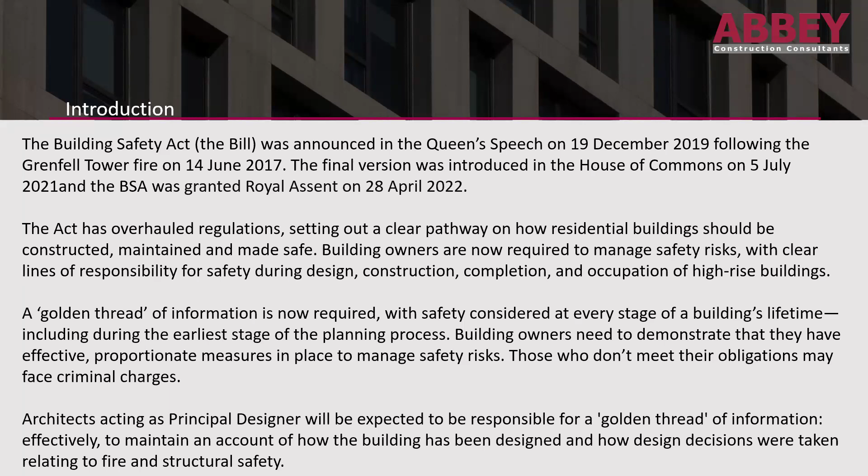These duty holders are those who procure, plan, manage or undertake building work, and they are named as the client, the designer, principal designer, contractor and principal contractor, as is the same with CDM 2015 regulations. Duty holders are required to actively consider and manage building safety risks throughout the commissioning, design and construction process, and ensure that designs, if built, as well as the building work, comply with the requirements of the building regulations.

Of course, the regulations set out that duty holders in the design and build and refurbishment of buildings will be those, or organisations, who commission the building work, i.e. the client, and those who undertake the design work, the designers, and those who construct the building, whether it's a new build or refurbishment, contractors. The regulations apply to all work to which the Building Regulations 2010 apply. So if the building regulations apply, then the Building Safety Act and secondary legislation will apply.

The duties of cooperation, coordination, communication and competence are applied to all the duty holders for building work associated with high-risk buildings. The Building Safety Regulator has a range of assessment and enforcement powers to ensure that those participating in the design, the build, the refurbishment of buildings will be held to account and to ensure compliance with the building regulations.

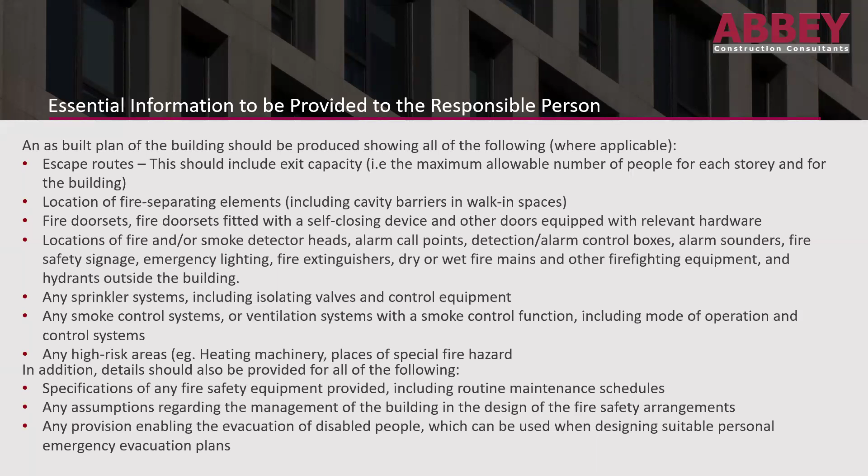Excuse me, I've got a bit of a cold and where I need to cough, I silence myself out.

So let's not forget about the Fire Safety Order, or the Regulatory Reform Fire Safety Order 2005, along with the Fire Safety Act 2021. So the Regulatory Reform Fire Safety Order was initially written with commercial industrial premises in mind, where premises is primarily a workplace. The Fire Safety Order would then apply to the whole building, and fire safety is linked with other aspects such as dangerous substances or dangerous processes.

The Fire Safety Act amends the Regulatory Reform Fire Safety Order with the intention of improving fire safety in multi-occupancy domestic buildings. Crucially, the external walls of a building and the fire doors to individual flats must now be assessed as part of the requirement for a risk assessment.

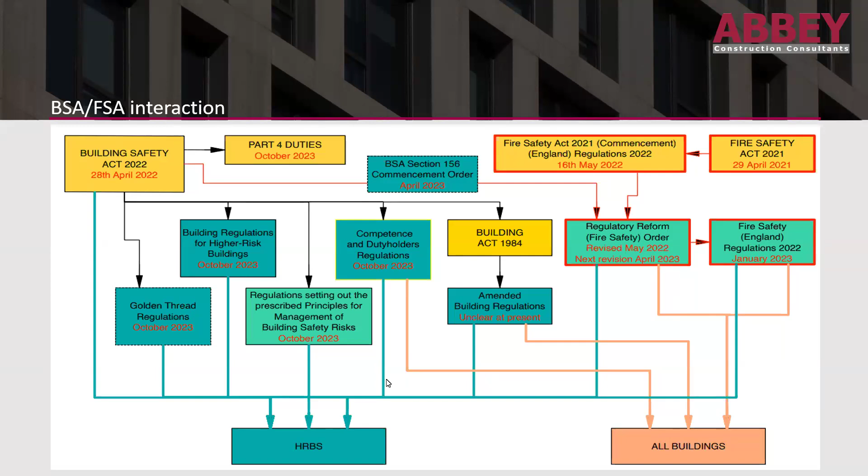And then we talk about fire safety documents. I was saying to Daniel as we started this presentation that there's so much information out there. It was knowing what is important to put in and what's not, because it's such a wide scope at the moment. So rather than go into detail in each one, such as tenants own fire risk assessments, tenants own maintenance records, testing of evac equipment, etc., I thought a flow chart would show that better than I could explain it.

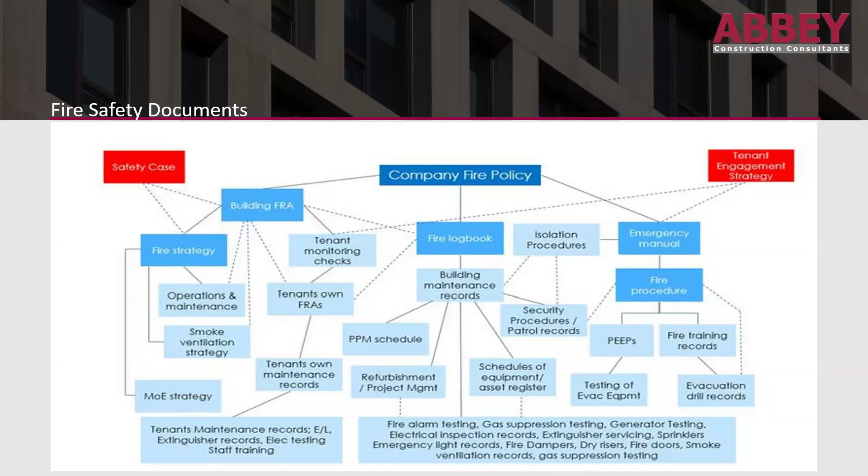So the Building Safety Act is made up of 6 parts, which is an introduction, its regulator and its functions, the Building Act 1984, the higher risk buildings, and other provisions about safety standards. And part 6 finishes it off with the general provisions around commencement, etc. I'm not going to read all these verbatim. I'll just give you an overview. So part 1 just explains the 6 parts that I've done.

Part 2 contains provisions about the safety regulator, what its functions are in relation to the buildings. Part 3 is where it amends the Building Act 84. And then amendments made by Part 3, Section 4, provide the regulator is the building control authority in relation to high-risk buildings in England. So any high-risk building in England, then the regulator would be the building control authority.

B, require the regulator for England and the Welsh ministers to establish and maintain registers of building control approvers and building inspectors. It's a little complicated reading that, but basically if it's a high-risk building, then the regulator is the building control authority. And to ensure where it doesn't fall into that category, they've now created a register of building control approvers and building inspectors, where they had a deadline to register their individual or their company through an assessment process to come onto that register.

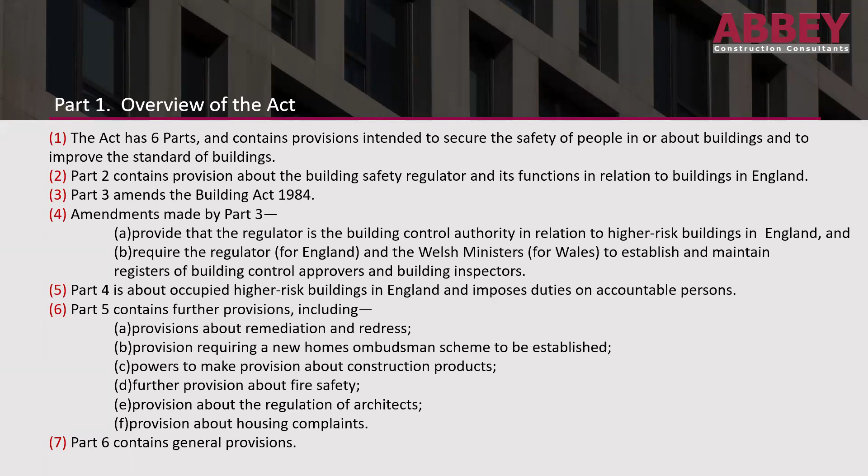So the regulator and its functions. The Building Safety Regulator, it talks about what this means. The Health and Safety Executive, although they're trying to come away from that. The schedule contains amendments to the provision of the Health and Safety at Work etc. Act 1974 that relate to the regulator.

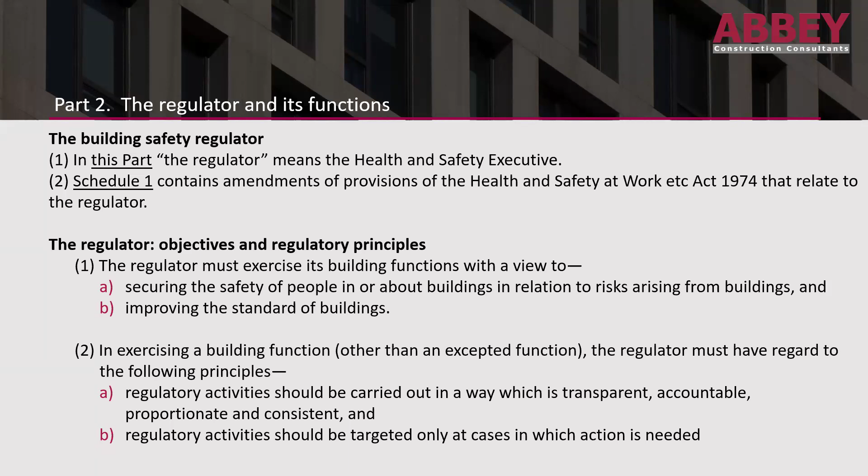But the regulator's objectives and regulatory principles are that the regulator must exercise its building functions with a view to securing the safety of people in or about buildings in relation to risks arising from buildings and improving the standard of buildings. 2, in exercising a building function, the regulator must have regard to the following principles. That's regulatory activities should be carried out in a way which is transparent, accountable, proportionate and consistent. And the regulatory activities should be targeted only at cases in which action is needed.

Part 3 of the Building Safety Act is construction, applies to new build or refurbishments, but mainly all new building work. Part 4 is in occupation, so in scope buildings, high-risk buildings, residential part of buildings. What is a high-risk building? There's a bit of a better picture later, but it's any structure which is 18 metres high or 7 stories and has 2 or more occupied units, of which 1 has to be occupied. A building safety risk is a risk to safety of people in or about a building arising from any of the following occurring as regards the building: the spread of fire, structural failure, or any other prescribed matter.

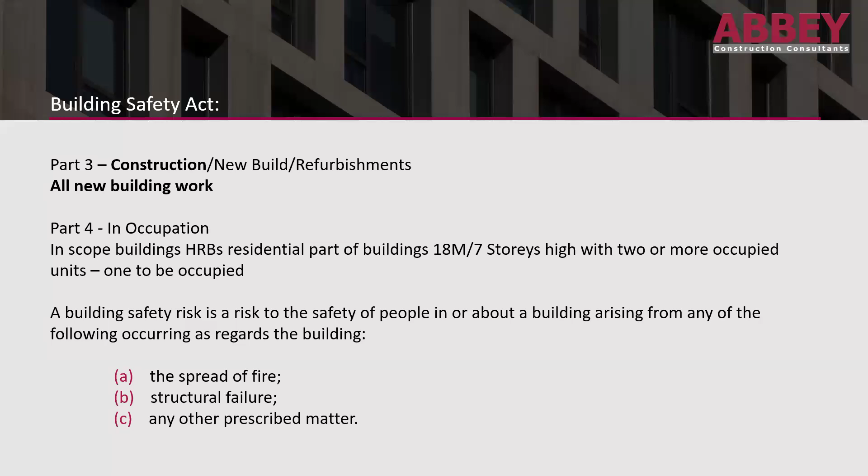The new regulatory regime regulates and holds to account those participating in the design and construction of new buildings and the refurbishment of existing buildings. The regulations apply to all building work and all persons participating in that work. The provisions also apply to those appointed under the Construction Design and Management Regulations.

When CDM applies to building work, those appointed under CDM 2015 will be deemed appointed under the building regulations, but only if they've got the necessary skills, knowledge, experience and behaviour. The provision will also ensure that when buildings are designed, constructed or refurbished, all duty holders, including existing duty holders identified in CDM 2015, will have formal responsibilities for compliance with building regulations.

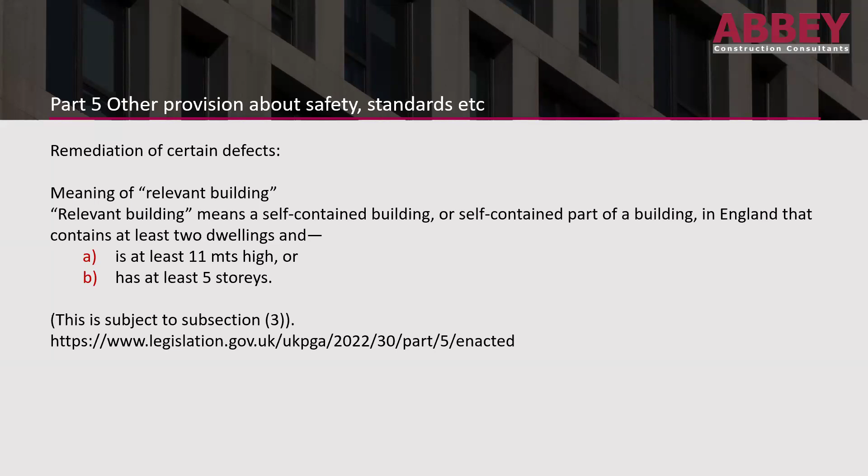So I'm jumping now on to the new Part 2A, which is the Building Regs Amendment England Regulations 2023, and it created a new Part 2A, Duty Holders and Competence, into the Building Regulations 2010. I've listed out the most important ones. So 11A: a client must make suitable arrangements for planning, managing and monitoring a project, including allocation of sufficient time and other resources, so as to ensure compliance with all relevant requirements. Arrangements as to information, i.e. higher risk building work.

Go on to 11B. Client must make suitable arrangements to ensure information is provided to the designers and contractors working on a project which includes any higher risk building work, to make them aware that the project includes higher risk building work and the nature of the higher risk building work. 11C: where the client is a domestic client, the duties in regulation 11A(1) to (3) and 11E(2) must be carried out by either the principal designer or the principal contractor.

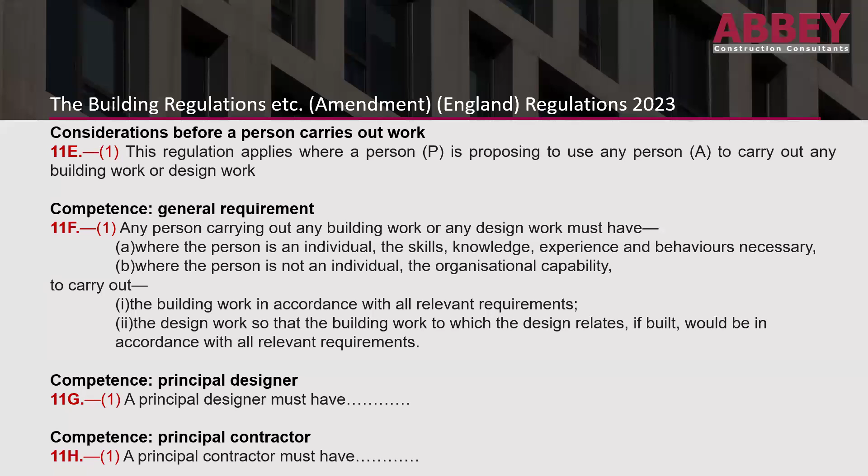What I'm seeing in industry is the PQQs are still getting sent out where they've not taken into account the BS or the PAS document competence requirements. I've also got a thing with PQQs where they'll ask if they've suffered any prosecutions in the past 5 years, but they tend not to ask if they've suffered a fee for intervention, which is, in my opinion, relevant. So there's a hint there for your PQQs.

And that moves us on to duty holders regulations, where we look at the accountable person and the principal accountable person. So an accountable person is an organisation or individual who owns or has a legal obligation to repair common parts of the building. Common parts are used by residents, for instance, the structure and exterior of the building, corridors, lobbies, staircases, etc. An accountable person can be a freeholder or estate owner, a landlord, a management company, resident management company, a right to manage company, commonhold association, etc.

A principal accountable person: each building must have one clearly identifiable accountable person who would be known as the PAP or the principal accountable person. The principal accountable person is usually an organisation like a commonhold association, local authority or social housing provider, and in some circumstances an individual can be the PAP. For example, the individual is the owner of the building or named on a leasehold as responsible for the maintenance of common parts.

The golden thread, which is set out as part of Regulation 11A. So the arrangements made by a client under Regulation 11A must be suitable arrangements to ensure compliance with the requirements, etc., of the building regulations. They must include, where the work is higher-risk building work or a stage of higher-risk building work, arrangements for an electronic facility to be created and maintained by the client, and procedures for persons involved with designing or carrying out work to have access to the facility for the purpose of maintaining the golden thread.

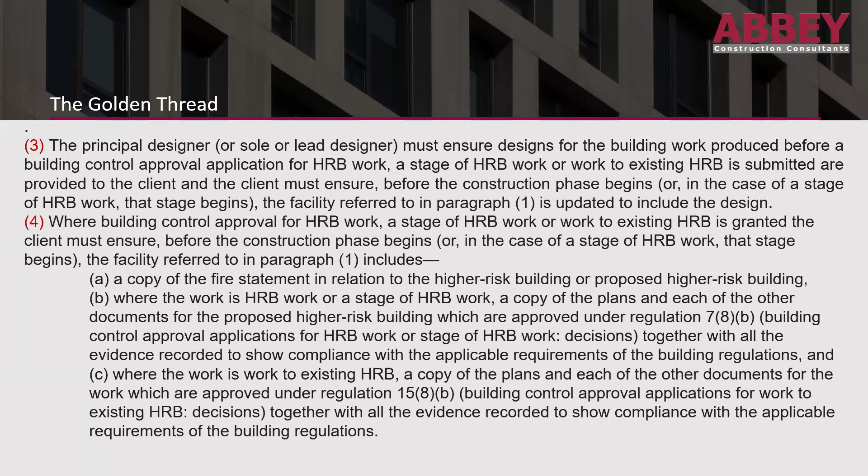Excuse me. So that moves us on to the safety case. Reasonable measures must be taken to manage the risk of spread of fire and structural failure to prevent their occurrence and limit the impact should an incident occur. The aim of the safety case regime is to ensure that those responsible for buildings, i.e. the accountable person, deliver a continuous preventative and proactive approach to managing building safety risks. The accountable person will be the individuals or entities responsible for meeting the statutory obligations related to the management of building safety risks in occupied high-rise residential buildings.

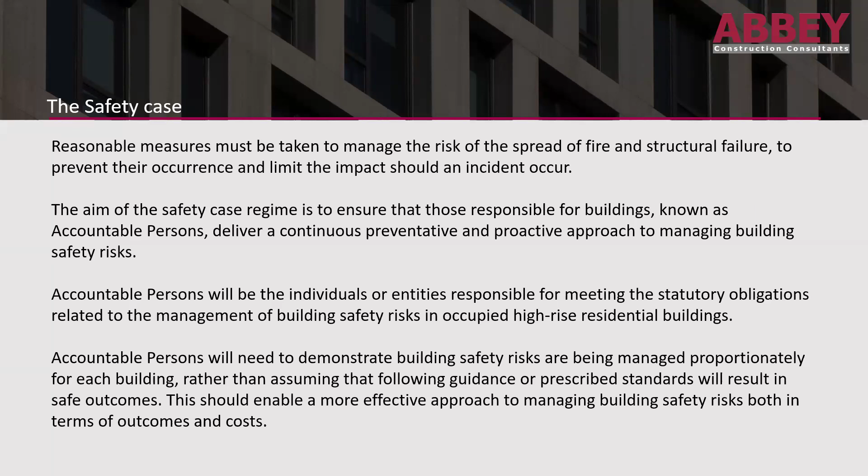Accountable persons will need to demonstrate building safety risks are being managed proportionately for each building, rather than assuming that following guidance or prescribed standards will result in safe outcomes. This should enable a more effective approach to managing building safety risks, both in terms of outcomes and costs. The safety case is all the information the principal accountable person and accountable person will use to manage the risk of fire spread and the structural safety of the building.

The Building Safety Regulator has published guidance on safety case and safety case reports to help those who will have duties under the Act to get ready for the regime and manage risks effectively. The information is designed to help those who will have duties under the Act to prepare for the new regime. And I put the link on there, which will take you to the safety case and safety case reports. They contain information and advice on what the Building Safety Regulator will need in any submission. The guidance covers building information, identifying building safety risks, risk prevention and protection information, safety management systems, and the safety case report.

So I've put an example on here in layman's terms because it just makes it slightly more easy to digest. But let's say a structure must implement fire and structural safety requirements as part of Part 3. So an example, a designer designs a breakthrough of an internal wall which provides compartmentalization for a fire water supply to a fire sprinkler system. The designer has stated a specific passive fire protection material for sealing the wall and providing the required fire compartmentation.

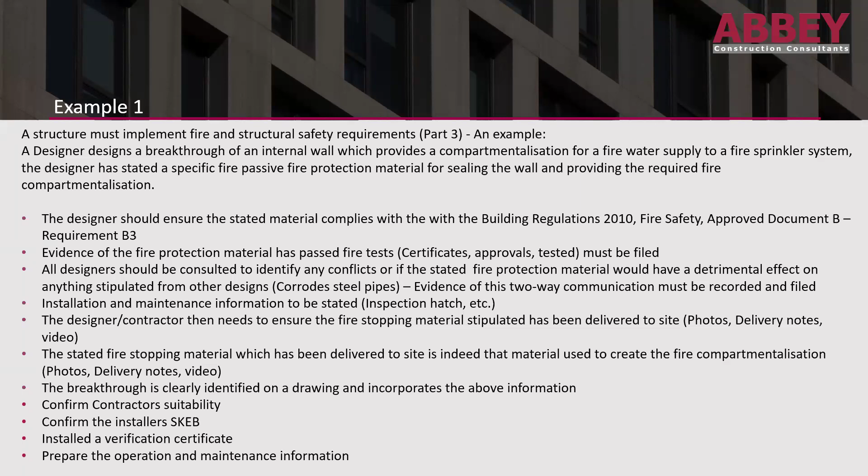And then the breakthrough is clearly identified on a drawing and incorporates the above information. So all of that information above should be on that drawing. You would then need to confirm the contractor's suitability and then confirm the installer's skills, knowledge, experience and behaviour. And then you would obtain an installer verification certificate and then prepare the operation and maintenance information. That's for the O&M manuals. So that's example 1. Example 2.

You need to ensure that you're capturing information which will apply to the building or buildings as from October 23. For example, if a structure is currently being designed and the planned handover is on or later than October 23, which it would be now, you must have the required information and assurance. As an example, if an extractor fan is fitted, then this falls into the Building Regulations Part B, Schedule 1. The fire safety order applies the day you hand the building over, therefore the information you would need to provide

is as follows. Has the smoke extraction fan been designed with consideration to the scope of the building? Are the required certificates available? Is the extractor fan compatible with the rest of the building? Does the extractor fan comply with the overall fire strategy? What are the servicing and maintenance requirements? Is a drawing available identifying the extractor fan by either building, location, floor, room, etc.?

All the above needs to be handed to the client in a format it can be reviewed and read easily and can be amended when required. You'll need to obtain and file the documents as the project develops as part of the Building Regulations and Building Safety Act. This is part of the golden thread of information.

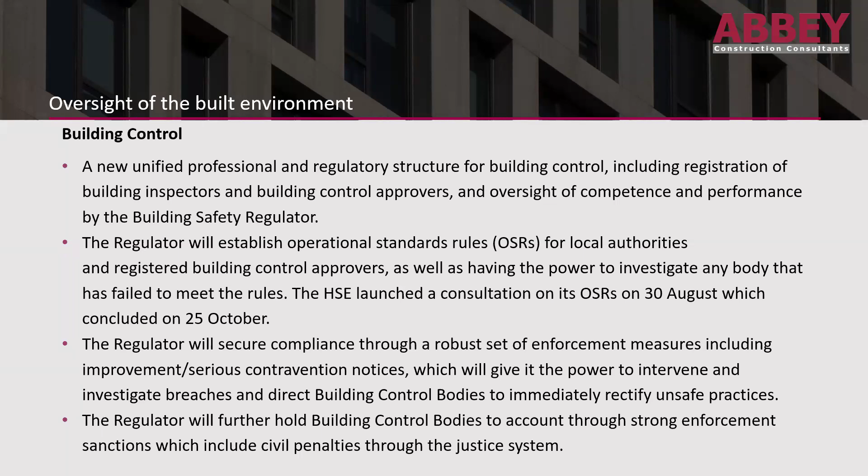So they have three main functions. I'm just conscious of time. The BSR has three main functions: overseeing the safety, performance and standards of all buildings, assisting and encouraging the built environment industry and building control professionals to improve the competence, and leading implementation of the new regulatory framework for high-risk buildings.

At the heart of the government's reform is the creation of the first national across England building safety regulator. The new regulator's got three main functions: leading the delivery of new, more stringent regulatory regime for higher risk buildings or residential buildings of 18 metres. During the design and construction, the building safety regulator will act as building control body for residential buildings 18 metres plus and hospitals and care homes that meet this height threshold.

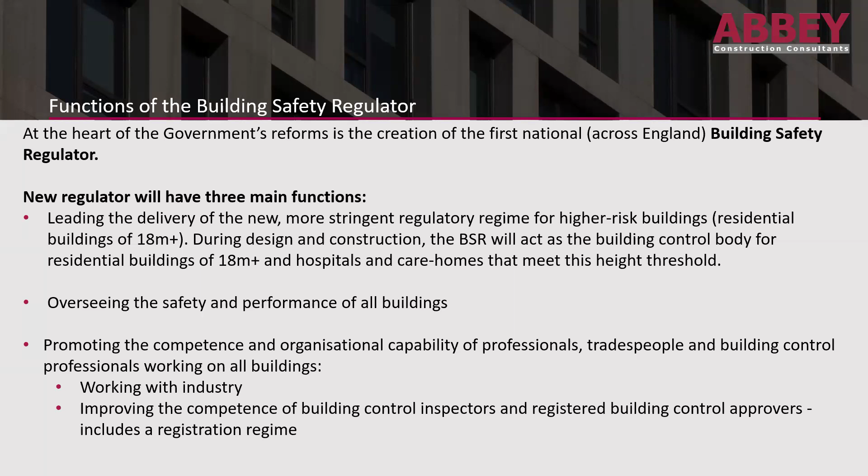Overseeing the safety and performance of all buildings and promoting the competence and organisational capability of professionals, trade people and building control professionals working on all buildings. Working with industry and improving the competence of building control inspectors and registered building control approvers.

What does this mean for building owners? Well, design and construction of all new buildings is defined roles based on the construction design and management regulations model, i.e. client, PD, PC, designer, contractor. This will apply to all building work, not just high risk building work. Supported by competence requirements, ensuring those carrying out design or building work are competent or trained and supervised appropriately.

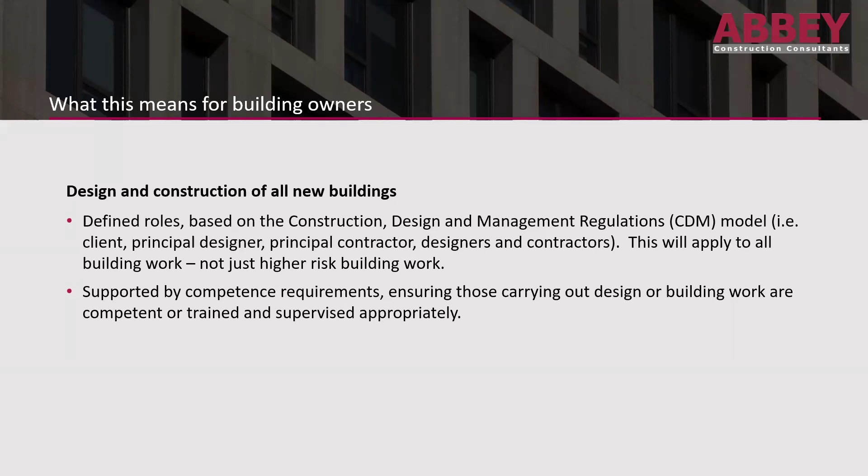So again, if you're doing a CDM project or you're doing a high risk building, you would need to demonstrate the competent thresholds of each appointee. That includes architects, lead or main designers, contractors, principal contractors, and that assessment would hopefully be against the BS 8670, PAS 8671 or PAS 8672, because they're the new sets of competence requirements that set out the requirement for the behavioural section, as well as more information on the skills, knowledge and experience.

So design, construction and management of high-risk buildings: a new building control approval regime with gateways, which are stop and go decision points. They require approval before a duty holder starts construction and a completion before the building can be occupied. A new golden thread of building information started during construction and stored and updated throughout the building's life cycle to support the ongoing management of the building safety risks.

Introduction of a safety case approach to managing the building safety risk, so the accountable persons must provide assurance to the regulator and to their residents that they've got effective, proportionate measures in place to manage safety risks on an ongoing basis. There will be mandatory reporting to the new regulator of fire and structural safety occurrences which could cause a significant risk to life, and those who don't meet their obligations may face criminal charges and ultimately up to 2 years in prison and an unlimited fine.

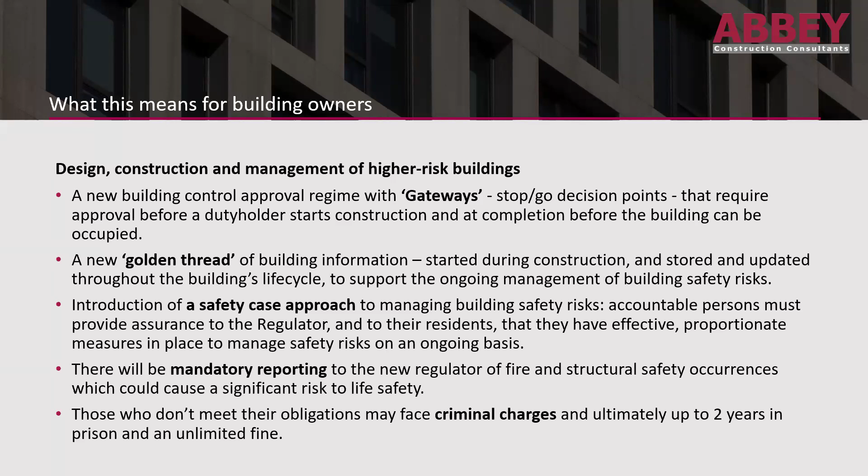The accountable persons are required to register the building, this is a high-risk building, with the Building Safety Regulator, carry out an assessment of the building safety risks and take all necessary steps to reduce or manage the building safety risk, and produce a safety case. So your safety case is explaining what you're going to do and how you're going to do it to prevent a major incident from occurring. Then you would provide a safety case report that sets out how you've done it and how you're going to manage it. And then provide the necessary information to apply for a building assessment certificate when requested by the regulator.

So Gateway 1, I'm conscious of time, so I'm sliding on a bit. Gateway 1 is the fire statement. So you'll submit your fire statement, which is here. So you'd have your project plan down to Gateway 1, your fire statement. We've gone through what that is. You then move to Gateway 2. Gateway 2 is where you'd make your appointments, start to apply the golden thread arrangements. But remember, it's a hard stop. So you can't move to Gateway 3 until Gateway 2 has been successfully passed. Then Gateway 3 would be your golden thread of information, and the regulator will then issue a completion notice.

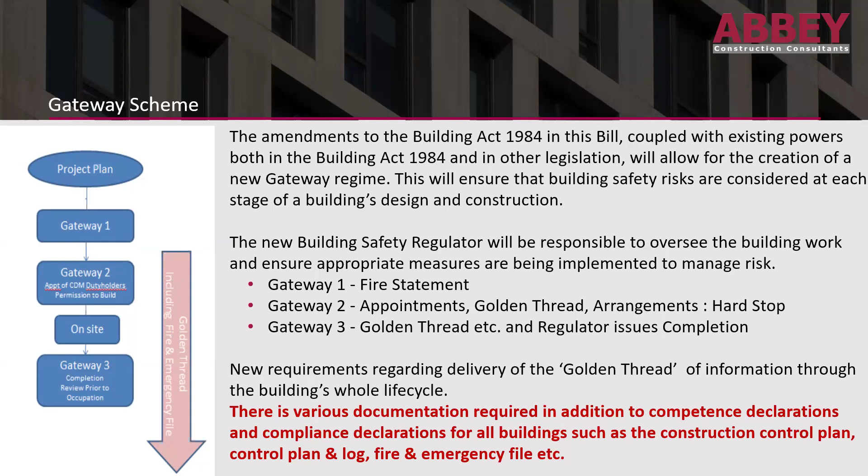So Planning Gateway 1 ensures the consideration of fire safety matters as they relate to land use planning are incorporated at the planning stage for schemes involving HRBs. Gateway 2 is before building work commences, and it replaces the building control deposit of plans stage before building work starts. And Gateway 3 is when building work is completed. That'll occur at the current completion or final certificate stage when the relevant building work is complete. Again, I've put in bold Gateway 2 and 3 as stop and go decision points that must be passed before a development can proceed to the next stage.

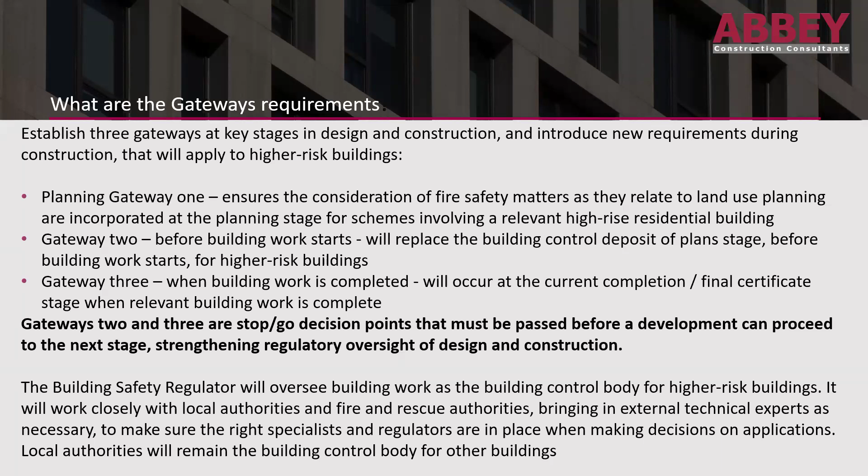This strengthens the regulatory oversight of the design and construction. The Building Safety Regulator will oversee building work as the building control body for HRBs, and it will work closely with local authorities and fire and rescue authorities, and it will bring in external technical experts as necessary to make sure that the right specialists and regulators are in place when making decisions on applications. Local authorities will remain the building control body for other buildings.

Gateway 1, I'm not going to read all this, but you can see from this drawing that the height of the top storey excludes the rooftop plant area, so you wouldn't include that as part of your measurement. You would start from here, but that would come down to the lowest level. The fire statement is to contain the principles or concepts and approach relating to fire safety that's been applied to each building in the development and the site layout; emergency vehicle access; water supplies for firefighting purposes; what, if any, consultation has been undertaken on issues relating to fire safety of the development and what account's been taken of this; and how any policies relating to fire safety in relevant local development documents have been taken into account.

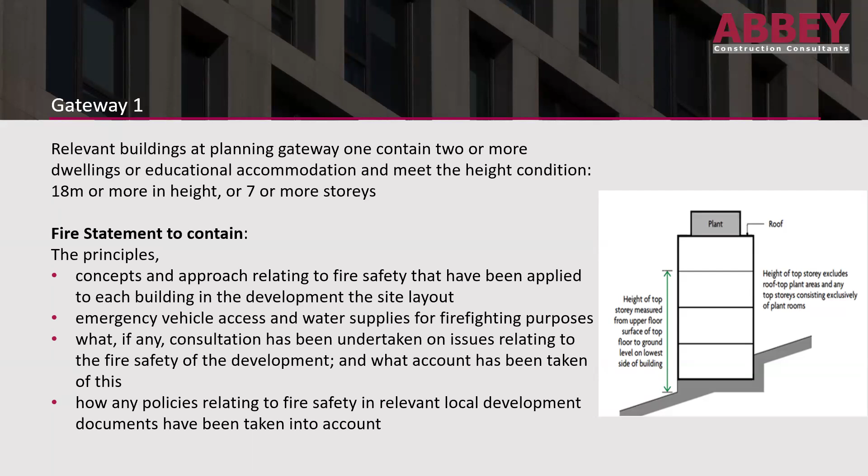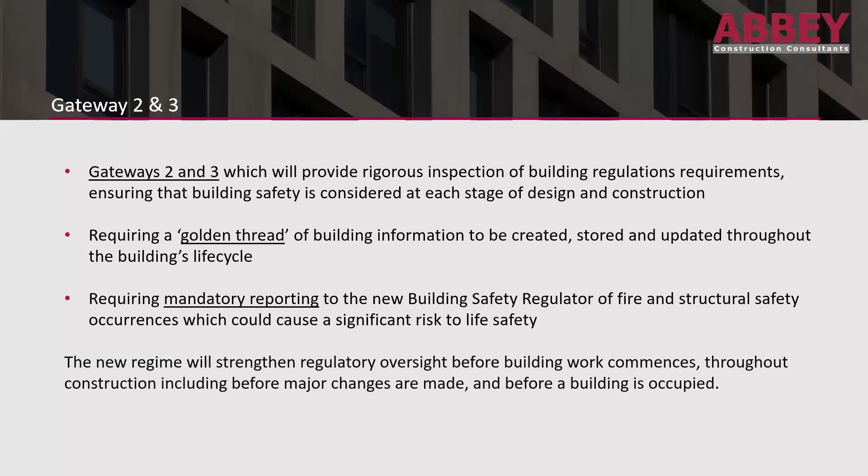Gateway 2 and 3 will provide a rigorous inspection of building regulation requirements, ensuring building safety is considered at each stage of design and construction. It requires a golden thread of building information to be created, stored and updated throughout the building's life cycle, and requires mandatory reporting to the BSR of fire and structural safety occurrences which could cause a significant risk to life safety. The new regime will strengthen regulatory oversight before building work commences, throughout construction, including before major changes are made, and before a building is occupied.

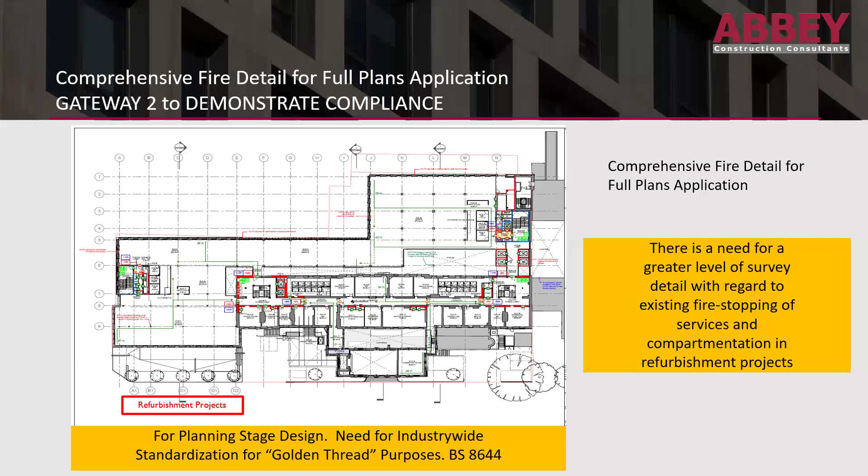The golden thread is both information about the building that allows someone to understand the building and keep it safe, and the information management to ensure that the information is accurate, easily understandable, can be accessed by those who need it, and is up to date. And it's the duty of the people responsible for the building to put in place and maintain a golden thread of information. Going forward, the information management for safety will need to be embodied across the sector.

Again, there's a link there if you want more information on that. The golden thread incorporates all the information needed to understand the building and how it should be managed so that the building and, above all, the people in and around the building are safe both now and in the future. Make information easily available to the right people at the right time and put in place a new high standard of information keeping, which will support the building safety regulator in being assured buildings are being managed safely.

Implementing the golden thread will require individuals and organisations responsible for a building to have good information management systems and a clear understanding of how information management supports building safety. Going forward, the information management for safety will need to be embodied across the sector. I've put here the powers to mandate the golden thread: building regulations, notification and provision of report, mandatory reporting requirements, and keeping information about high-risk buildings.

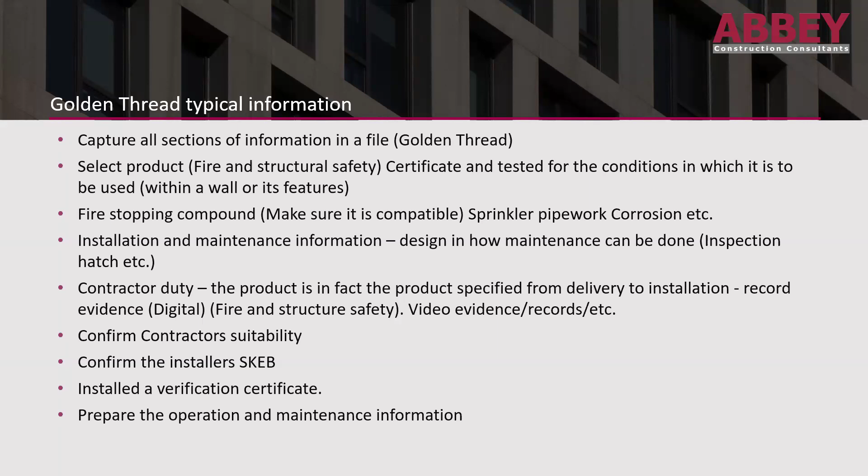Fire stopping compound, make sure it's compatible. Installation and maintenance information, designing how maintenance can be done. Contractor duty: the product is in fact the product specified from delivery to installation. Again, evidence required. Confirm the contractor's suitability, confirm the installer's skills, knowledge, experience and behaviour, install the verification certificate and prepare the O&Ms.

There's a new regulator for construction products, a national regulator. I'll leave you to read this. I'll talk around it. I'm fully aware of some of the issues we've got where one supplier is putting a product on the market which has been tested and complies with the building regs, and then another supplier has put a product on the market that's been tested and certificated in line with the building regs, but then there's no compatibility certificate to say that material A has been tested in conjunction with material B and there's no detrimental effects.

So that part is missing, and supplier A is saying we're not paying for it, supplier B saying well, we're not paying for it. So that's where it's falling down at the minute, but I'm sure they'll come to some kind of arrangement. There's new powers so that all construction products marketed in the UK fall under the regulatory regime, allowing them to be withdrawn from the market if they present a safety risk.

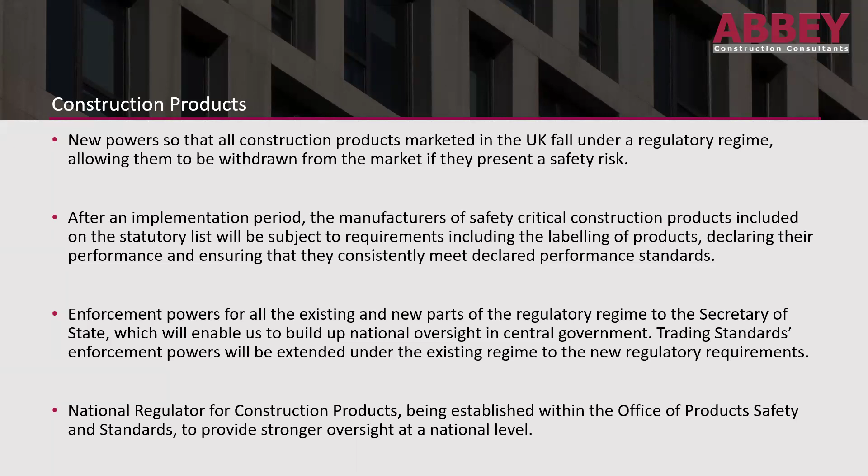After an implementation period, the manufacturers of safety critical construction products included on the statutory list will be subject to the requirements, including labelling of products, declaring the performance and ensuring they consistently meet the declared performance standards. Enforcement powers for all existing and new parts of the regulatory regime to the Secretary of State, which will enable us to build up national oversight in central government trading standards. Enforcement powers will be extended under the existing regime to the new regulatory requirements, and the national regulator for construction products is being established within the Office of Product Safety and Standards to provide stronger oversight at national level.

Okay, we're nearly there, ladies and gents. So competence, I just wanted to cover this in the final slides. Competence is the requirement relating to the skills, knowledge, experience and behaviours of an individual. B, the capability of a person other than an individual to perform its functions under the building regulations.

The regulations may require an appointed person who is not an individual to give an individual acting under its control, who has the appropriate skills, knowledge, experience and behaviour, the task of managing its function as an appointed person. BSI is building a framework of documents which will raise the standards of competence across the built environment. I've already said BSI Flex 8670 built environment is the overarching framework for competence of individuals.

Just back on this one slightly, I'm currently working with a few local authorities where they have an AP who's responsible for doing safety case reports or notifying the HSE, which they should have done a while ago. But they still don't understand what their requirements are as an AP or a PAP. So currently working with them, but it is difficult.

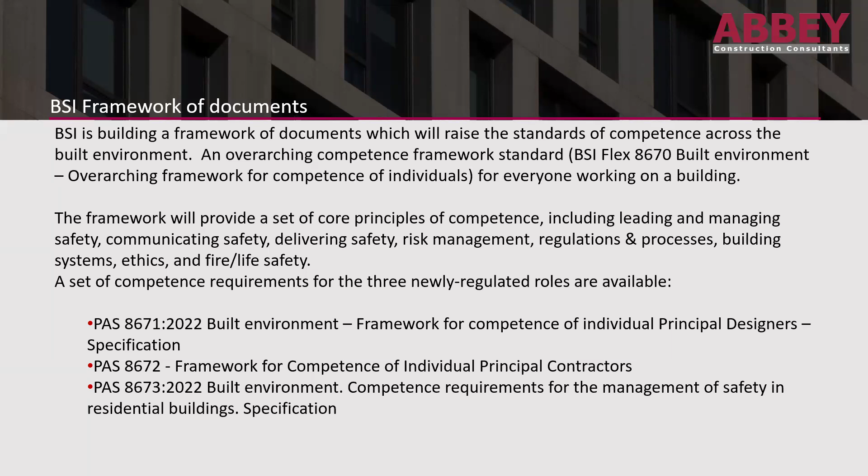Also under the BSI documents is PAS 8672, which sets out the competence of an individual principal contractor, and PAS 8671, which sets out the individual competence of individual principal designers, and PAS 8673, which is the built environment competence requirements for the management of safety in residential buildings specification.

BSI Flex 8670 has been created in response to the findings from the Hackitt review. This review highlighted a fragmented approach to and lack of consistency in the process and standards for assuring the competence of those working on buildings as a major flaw in the current regulatory system. Accordingly, BSI Flex 8670 now provides a set of core principles of competence, including leading and managing safety, communicating safety, delivering safety, risk management, regulations and processes, building systems, ethics, and fire and life safety.

PAS 8671 addresses competence thresholds that individuals are expected to meet when managing the duty functions of the principal designer role. It also specifies the minimum competence thresholds needed by principal designers and the additional requirements for working on higher risk buildings. Please remember this PAS 8671 applies to CDM, but it has additional requirements if working on higher risk buildings. Some people out there think these only apply to high risk buildings. These apply to all building work.

PAS 8672 can be used as a benchmark against which to assess competence of individual principal contractors. It can also help the principal contractors determine their own competence limitations and identify any areas for development. And PAS 8673 anticipates a competent senior manager within the organisation to be in place with overall responsibility to manage the resources necessary to deliver on Part 4 of the Building Safety Act. The organisations will need access to competent advice.